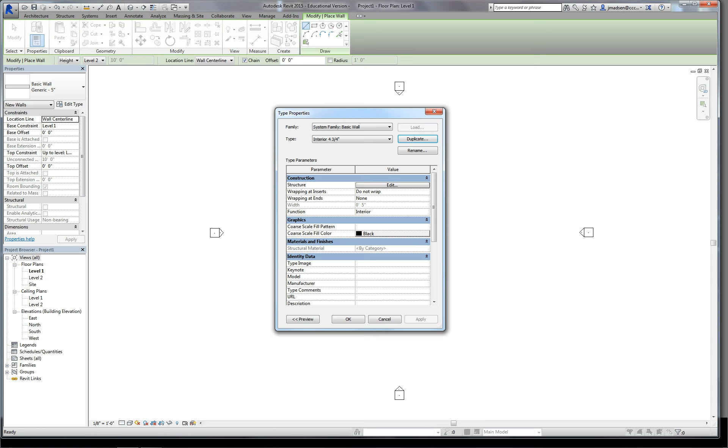So, things to think about - again, we're not going to be doing construction documents. So interior, we can say 4 3/4, right? If we go to our structure, we should know how to do this. So this would be 3.5, right? And then we insert 2 layers.

Take one up, take one down. Now there's not really outside inside, we'll say finish 1. And we can say gypsum, and we'll say 5/8. And whatever, you guys can do whatever you want.

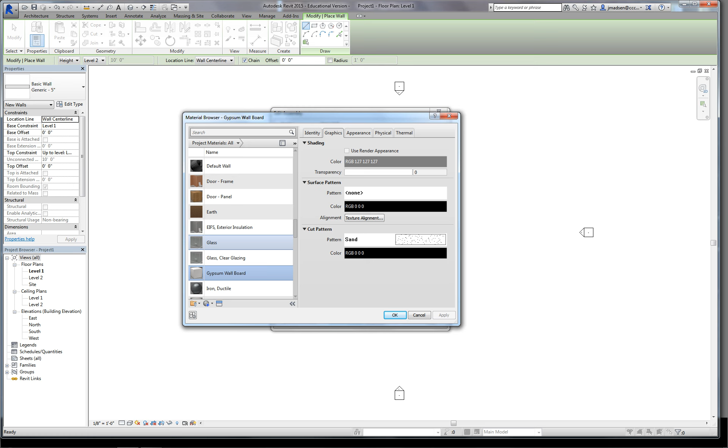You can do wood, sure. I'm trying to remember how they label it - metal stud. Yeah, metal, metal stud layer. There it is. So this has to be 5/8.

So again, we spend this little upfront time, and we can preview it. So there's our total thickness. We verify it, right? 4 3/4. Okay.

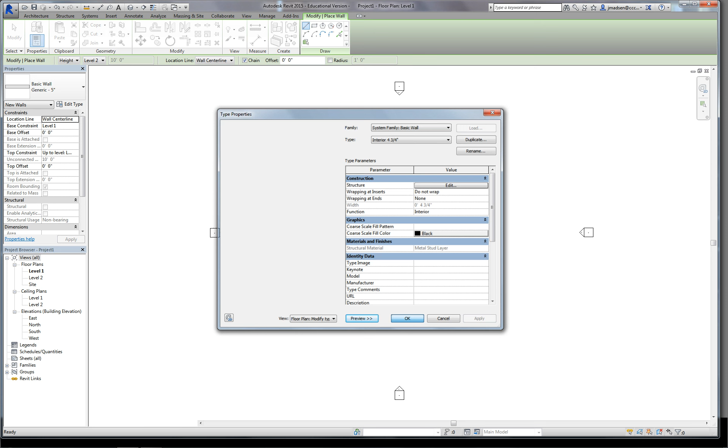So now we have our wall, so we can draw our wall. So there's our little interior room. And again, if we change our detail level to fine, we can start to see a little bit more, especially if we change to thin lines - view, thin lines, detail level, and this is per view, right? So we can change this per view. If we zoom in here, we can start to see some detail.

And if we change our scale, especially depending on what we'll - we start to see more detail in the sense of hatching, right? So all this sort of scaling is set up when we start laying them on sheets, just so you guys have a heads up, right?

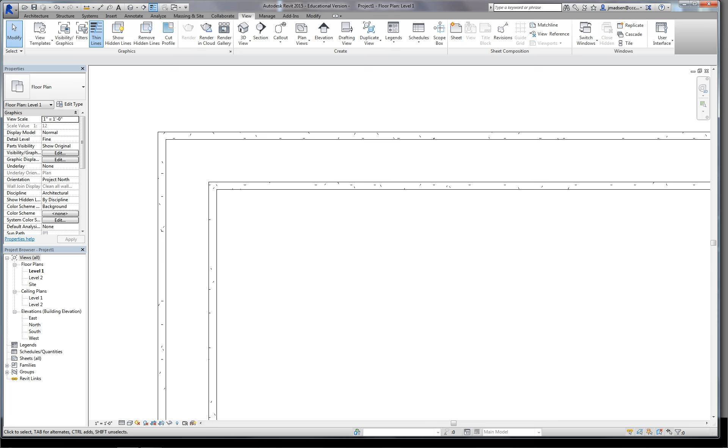Does Revit have the ability to show actual studs? No, you would have to frame it up. Like, is that allowed? Yeah, well we can make - we don't have to manually draw it, we can make...

Yeah, we can make like, you draw a line and it puts them in. I can set that up so it lays them in. You don't need it though - why would you want to do that? Unless you're doing a detail, like a framing diagram - I never got that far in Revit with Ivan. Yeah, if you ever really wanted to do a serious framing model, you can 100%, but then you get into more of the structural range where you're better off working with other tools, because then you can really study it structurally. To do it just for representation is a waste of time. Exactly.

The only other thing is for quantity - if you're going to be that crazy and want to know exactly how, like to the length. No, which is, I'm that type of person. Sure.

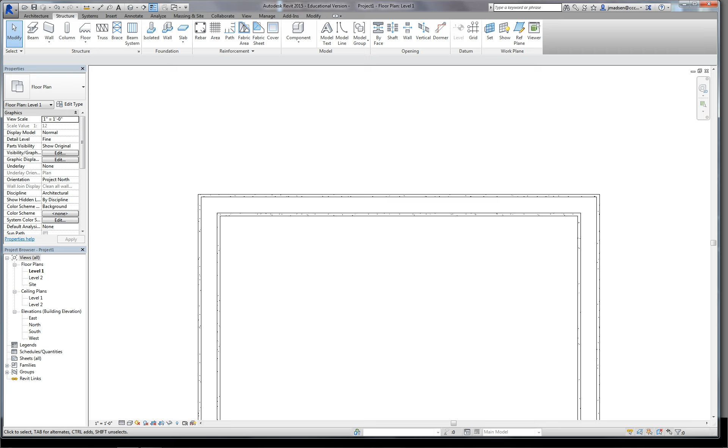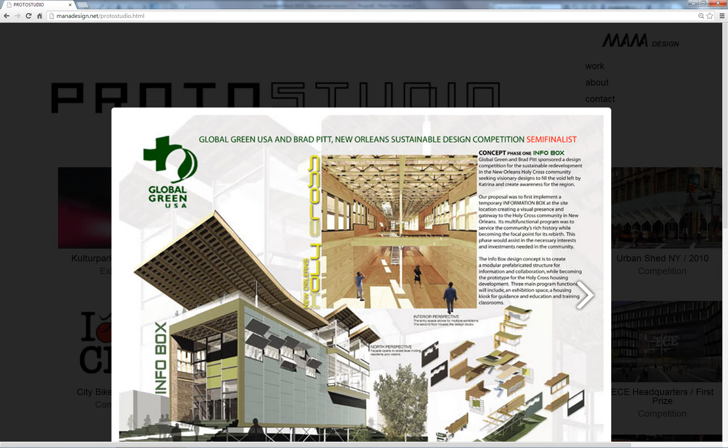So, right, you did something with metal studs. We did, I've done this, for a competition we did, back in the day. It's a little hard to see here, but we drew everything, like everything, and then we were able to count everything - every piece was modeled.

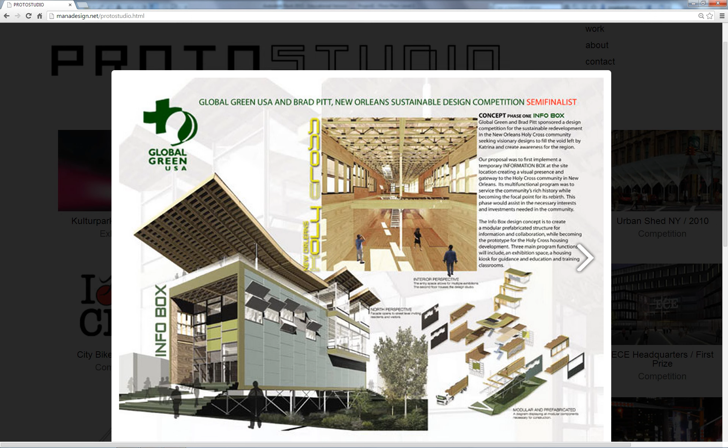It's a little hard to see there, but you see it a little bit better in here. So like everything, every little connection. We did this on purpose to see if we could figure out how many panels you have, because the whole idea is you built this and then it got recycled into this. So we wanted a full quantity count.

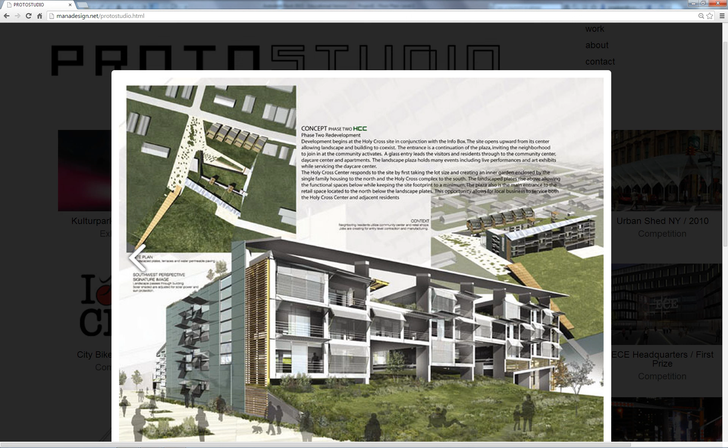So we did this all in Revit. You can do this stuff and get quantities, but be careful. You can do it if you want to crash your computer.

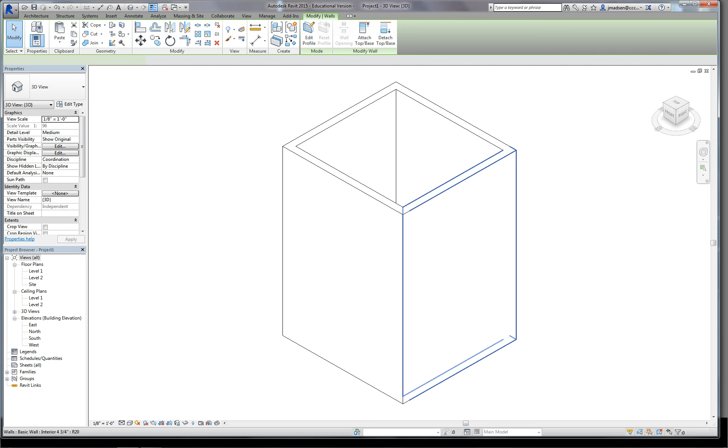So if we go into a 3D view, here's our little box. We are doing the wall openings, where we make an opening. Oh, did I just crash this? And we have an opening.

A lot of times we're going to start doing doors, so we use doors, and those doors will automatically make an opening for us. If we pick this flush door and plop it in here, basically this family allows us to place a door, which is sitting on the ground, but also have all the components like the jamb, the frame, and then also the door itself. And then we can show it at different sizes and so forth.

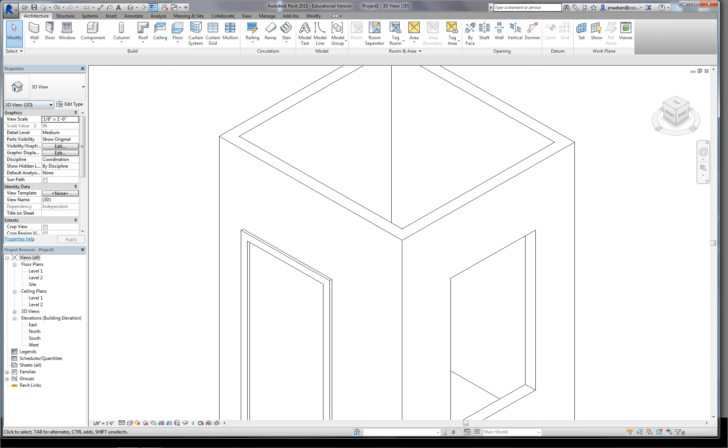So this is a family, all right? To demystify all of these parts, I think what happens is a lot of times people get hung up on like, hey, this is what I've got to use, this is the family. We can customize these. So we can look at door families and customize them and make our own.

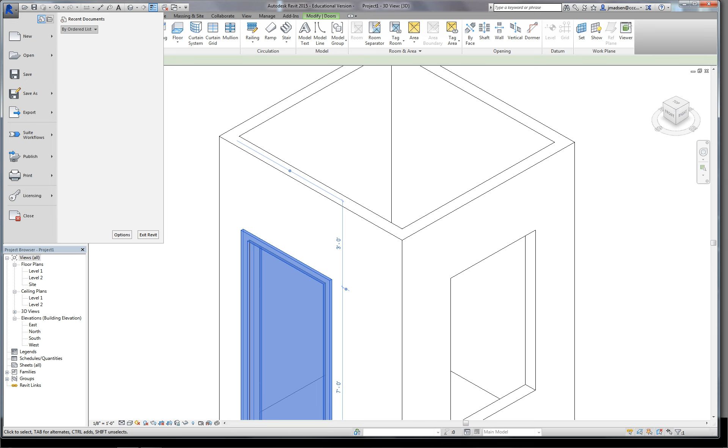So what happens if we go to the application icon and we look at families and we go to family new, there's a whole set of templates, okay? So we can go to a door template. And if we go to the door template, we can see how this door template works, so we can start to get a feel for what's being done.

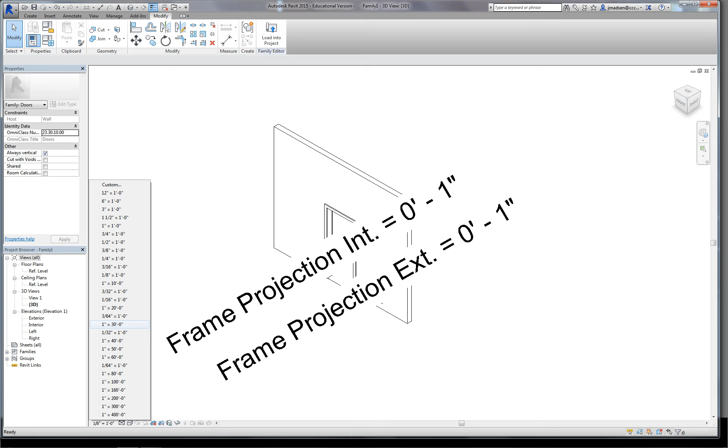So this is basically a template with a lot of parameters. What we're seeing here are parameters. Let me make that text smaller. And these parameters do a couple things, they punch the hole, it's a void.

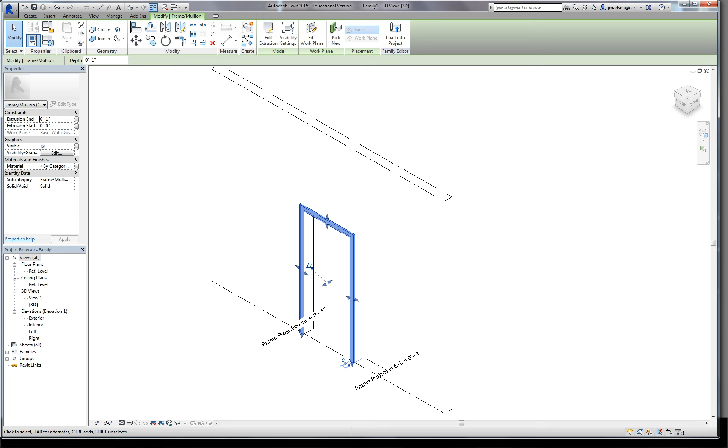So all these tools, I want you guys to feel comfortable, this door tool does a bunch of things for you. It basically punches, makes a void in the wall based on a size, which is the opening, and then makes a sweep. It does all the modeling stuff for you. And this all has different parameters. So if we pick on this stuff, you can see this is just a 3D modeled shape, and it has very specific parameters, like what the depth is. And eventually we can make our own things.

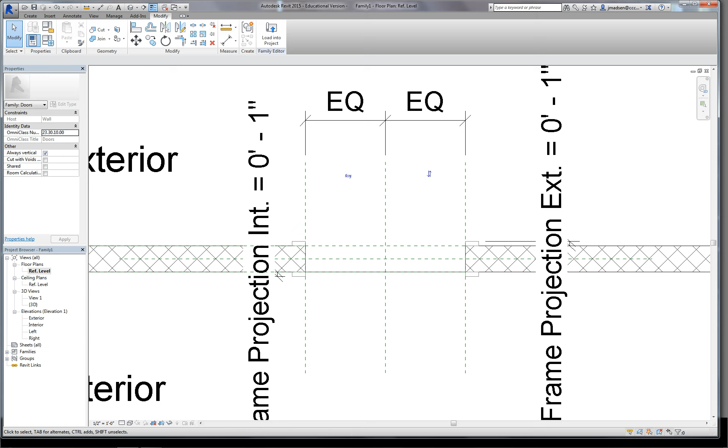Now doors are a very specific type of parameter, but these are actual parameters like the projection for the frame. And if you saw, we look from the top view, there's equal for the opening, like how it mirrors it. So there's all this sort of setup that's done, so when we plop this door in, it automatically aligns properly and so forth. So we can customize these things.

Now obviously we probably don't want to spend too much time customizing too much, but if I click here on the family types, this gives us all the parameters that are preset. So if I come here, these are all the parameters, like width, height, if it's interior or exterior. So this has all been set up for us.

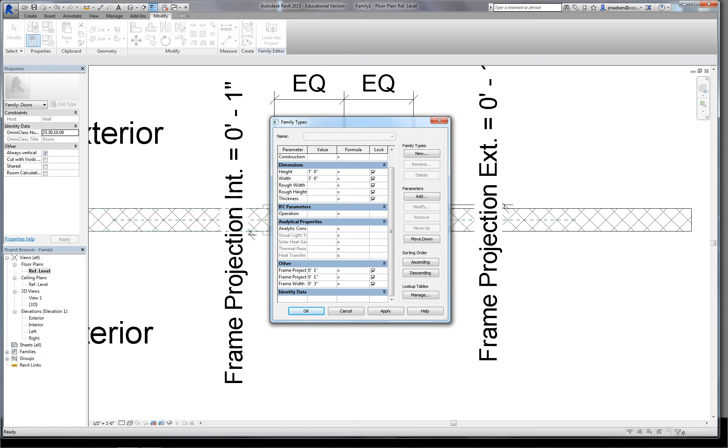The frame projection, the frame width, that's the door frame. We can turn them on and off, so we can customize that specific door to have different type of trim. And there's also the rough. Let's open this up. The rough width, the rough height that we can place in.

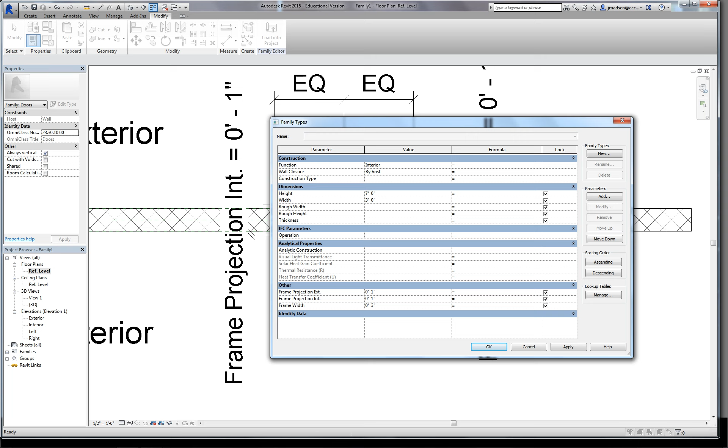So these, this width and height, are parameters, so if we change it, it's going to update. All right, so we see these parameters in that. So once we load this into the project, so you guys know how this is working, and we come here and say edit type, we see those exact same parameters under the type, the family type.

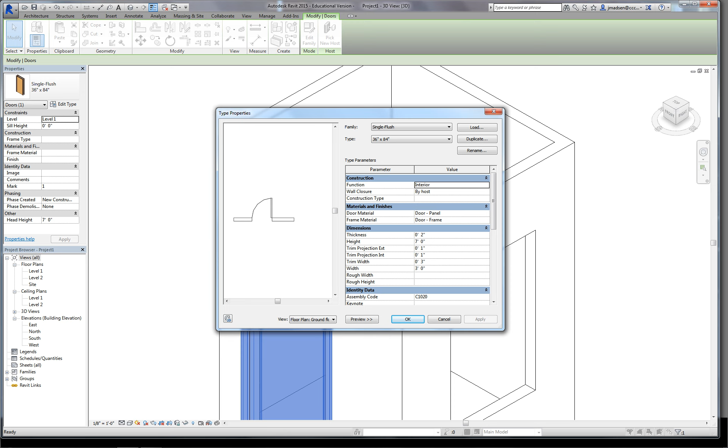So again, it's a very simple concept, and typically the doors that these are representing something. It's not the end of the world, but when it comes to making our own custom families, this is going to be important, to at least get the idea. So it's just how it works, and the walls work the same way as well. I mean, it's a family. And again, we see all these families down here, so we can see what's loaded.

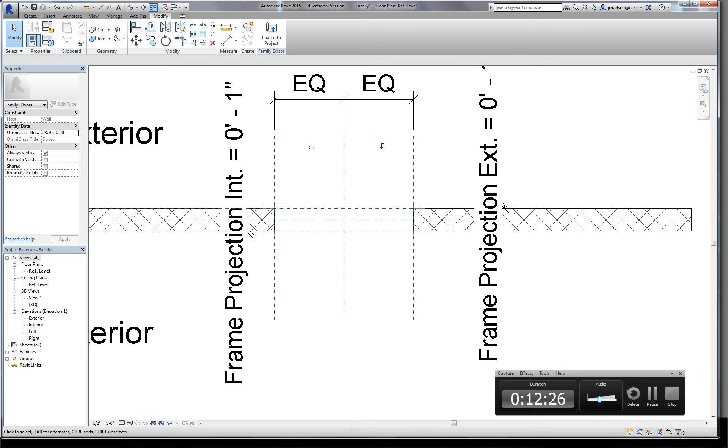Right now, single flush is loaded. And if I right-click and go to type properties, it brings up exactly these are all the type properties for these doors, all these parameters being set in the family. You could pull that molding off and all that kind of stuff. Yeah, you can come here and turn things off. You can turn it off here and reload it. So I can take all my frame.

You want to do something more modern with reveal and no molding, that kind of thing. So we can take all of that, should turn it off. Maybe it's not going to turn it off in here, but I can turn it off in the... so if I come back here, oops. Typically I can turn that off in here as well. Well, it's giving me the set.

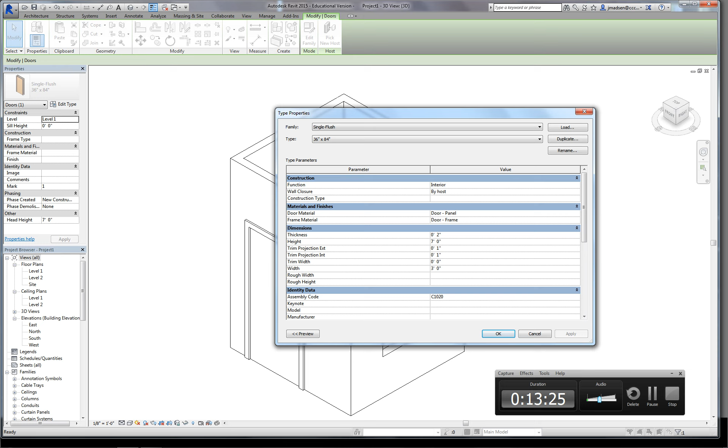Modify it. Yeah, we can modify it. So it won't let me go to 0. It's funny, it didn't let me go to 0. But what we can do, we can delete it and then load it back in.

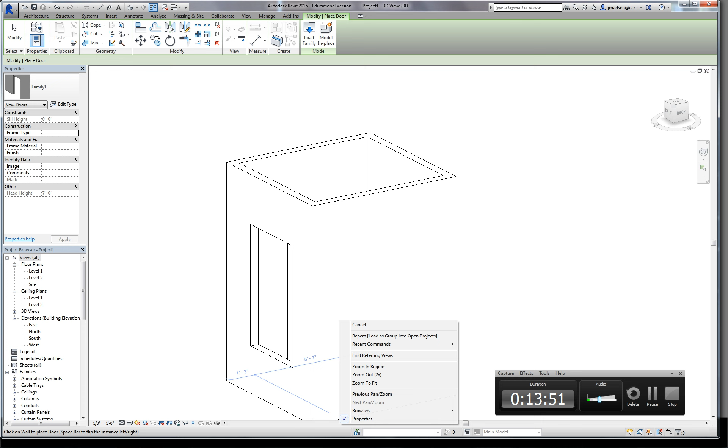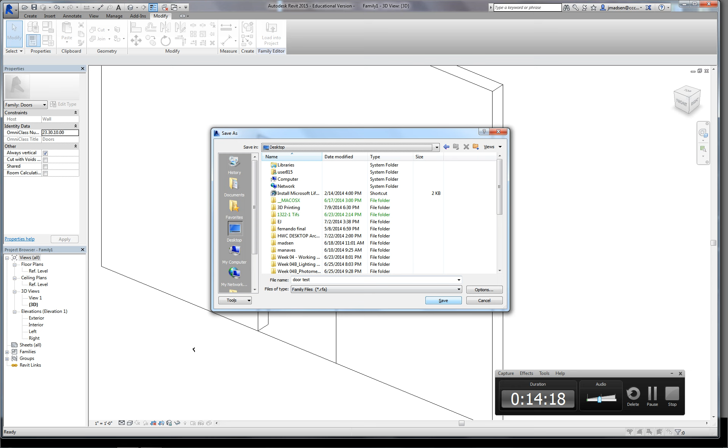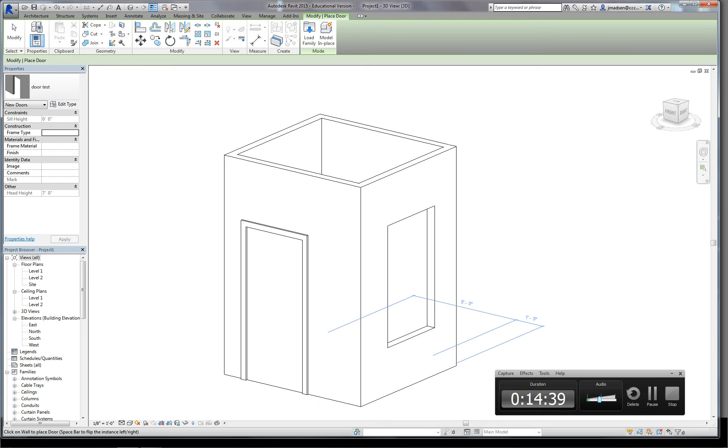And I should have overwritten it. Hold on, let me do a save as. So there it is. Now the door went away with it. Looks like I deleted the door. So you can customize. All right.

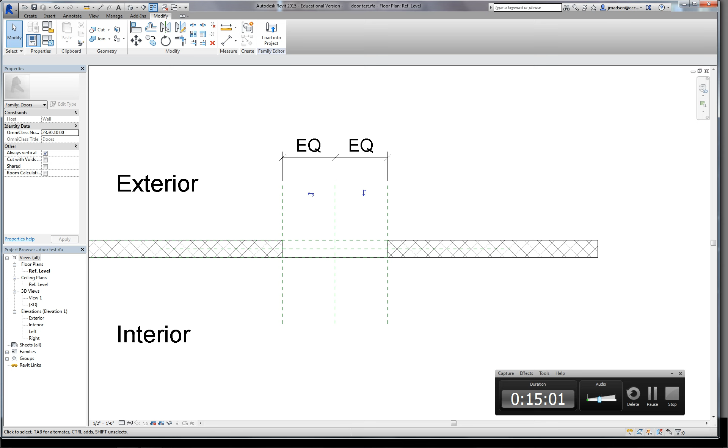So this just has a hole. Yeah, and if you want to make these custom elements, so let's go to this door, let's go in here. If we go into 3D view, what can I start doing? I can start creating a sweep, right? So if I make a sweep, I can pick the path. So this is where we can start custom modeling all this.

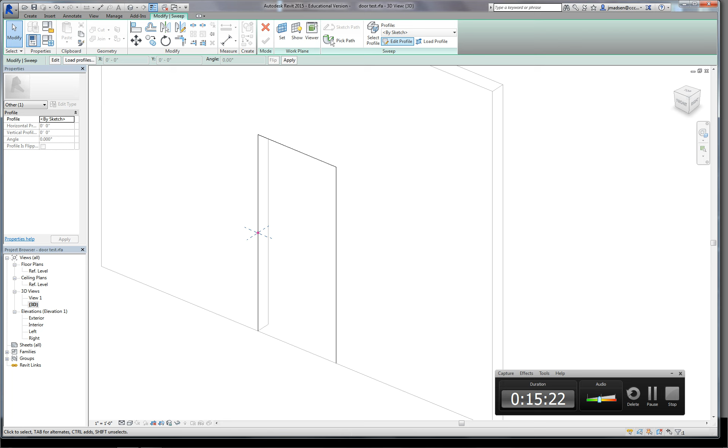All right, and then I'm going to go ahead and sketch this shape, so I can make a custom shape. Let's go ahead and just make something that's going to be obviously visible. So I'll sweep this. All right.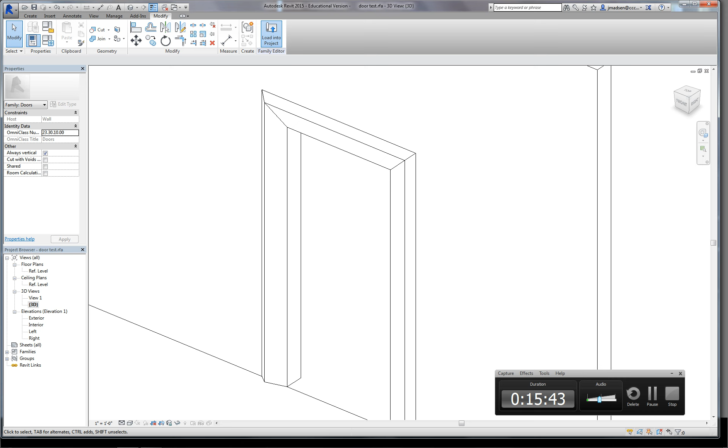Now if I load this back in, our door has the trim, and that's on the, and I have it on the inside. So it's no problem. Say I want it on the outside, just flip it. So we can customize all of this, all right?

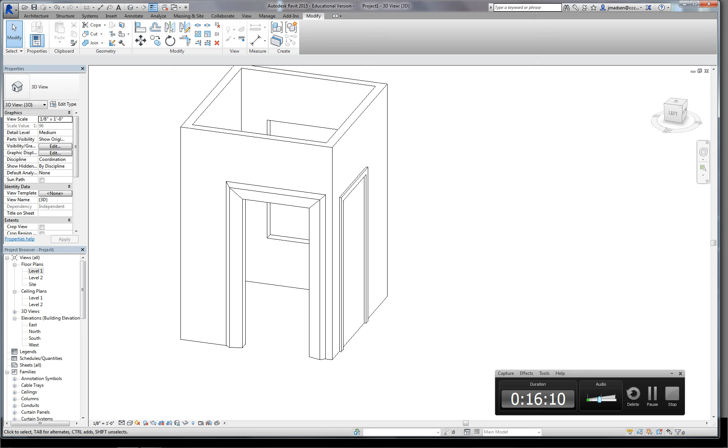Can you do the same thing with boards? So if you reveal into the wall, so if you had a piece of trim and then a reveal and step back into the wall? One more time, sorry. Can you do a piece of trim with a reveal next to it and the reveal that goes into the wall? Yeah, that's what I was thinking. Yeah, but we do it differently. That's what I was saying.

We do reveals on, so if we're doing like, if we pick a wall, like watch this. Say we have specific things, 2 walls. If I go to edit type and I go to edit, what I can do down here is insert, hold on, let me go to section. So you got to switch to section. So here's a section. So what I can do here is add sweeps or reveals.

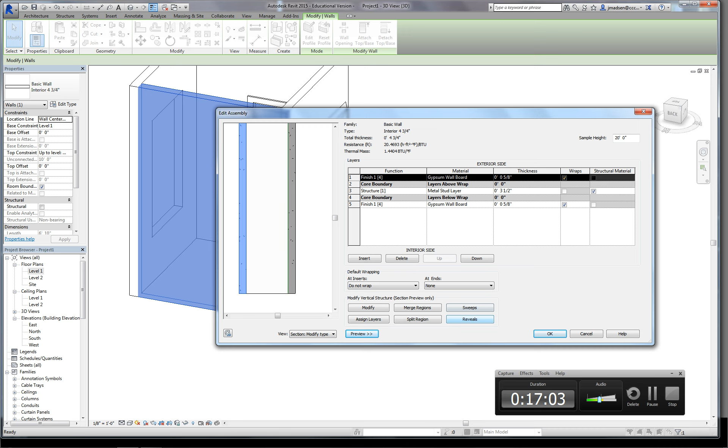So I can add a detail, so I got to load a profile. So this is how we do all the trim stuff. So I need to load a profile, so we need to make a profile. So let me make a profile first. All right, so say we want to add base trim, and then we want to do some type of reveal above the base trim, all right.

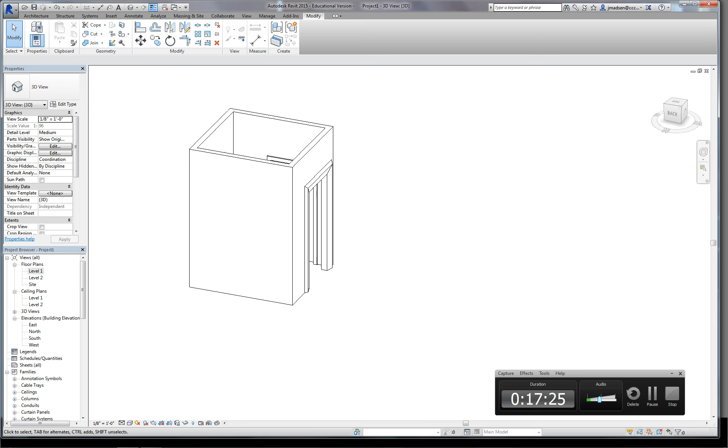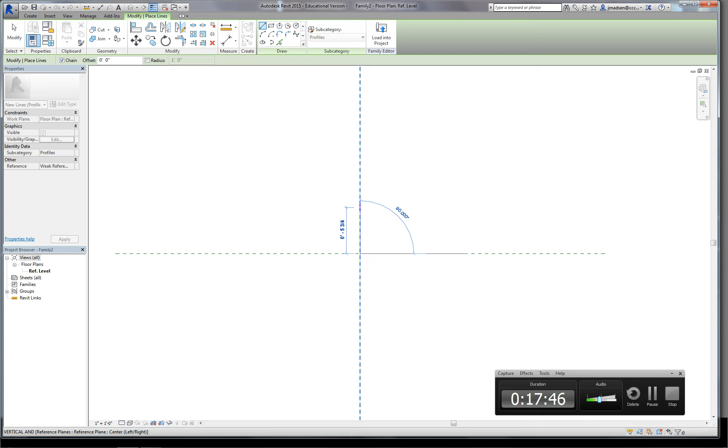You know, which we'll just... so we're going to go ahead and make a new family, and we're going to make a profile family. Okay, so we're just going to make a profile, and we typically have to remember like outside and inside, so sometimes we goof this up. But I'm just going to draw a profile, say we're doing something 6 inches tall, and then I'm just going to do something real quick.

So say this is our profile. I'm going to save this, storing everything on desktop, so it's going to be our trim profile, say 01. I can load that into the project.

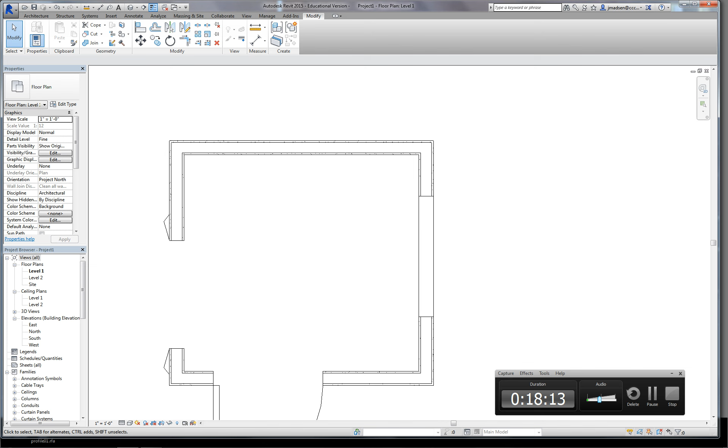So if I come here and pick that wall and edit the type, I have to switch to section, edit, and then typically we want to zoom down here, and then we'll go with sweeps. Let's see, so we can add a profile, and let's see, our profile should come - trim profile, hold on, there it is. You guys have better eyes than I do.

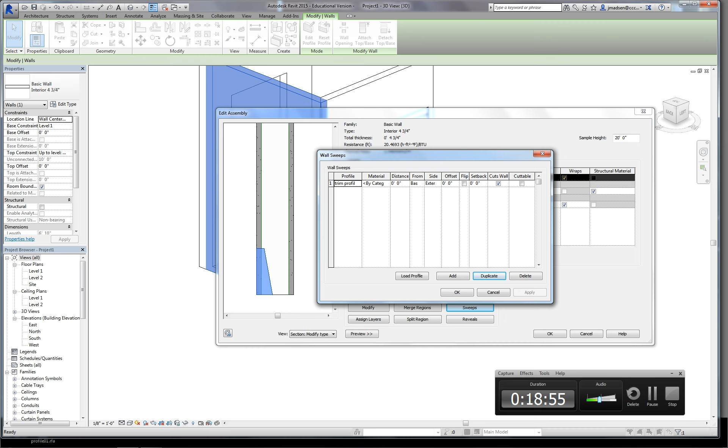So we add a profile, we load it, and then we can apply it, and then we can see we have it on the wrong side. So this is how you learn. So we got to go back to our profile. Just hit OK for now, and just hit OK, and just hit OK. It's inside our wall right now, we can't see it. But if I come here, all I got to do is mirror this.

Sorry, I'm like in a different program. Yeah, it's my day, it's called bipolar cell phone. Yeah, hold on, I gotta.

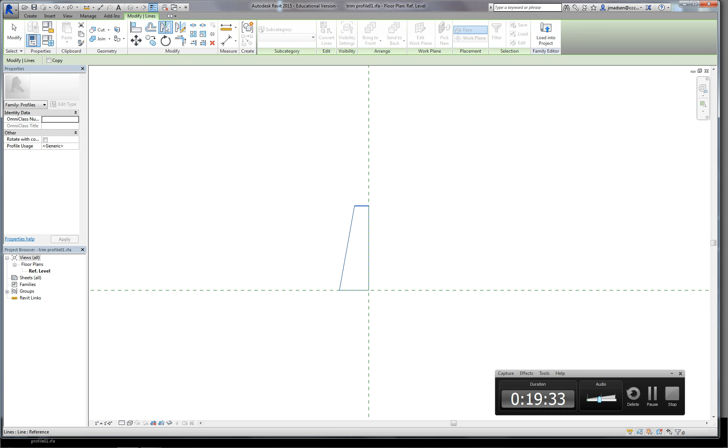Okay, so I'm going to keep at it. I'm going to load this and overwrite, so then I'll flip on the right side.

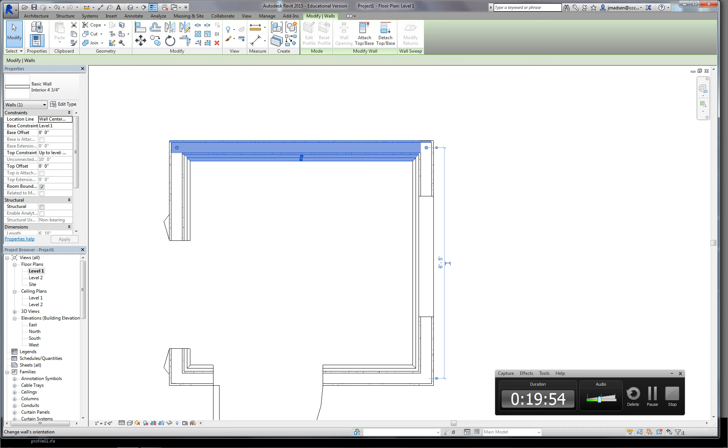So that's going on the inside right now. No problem, these walls have inside and outside, so I can flip it. Let me undo that. If we use the tab key, we can pick all the walls, but sorry, we've got to flip them individually.

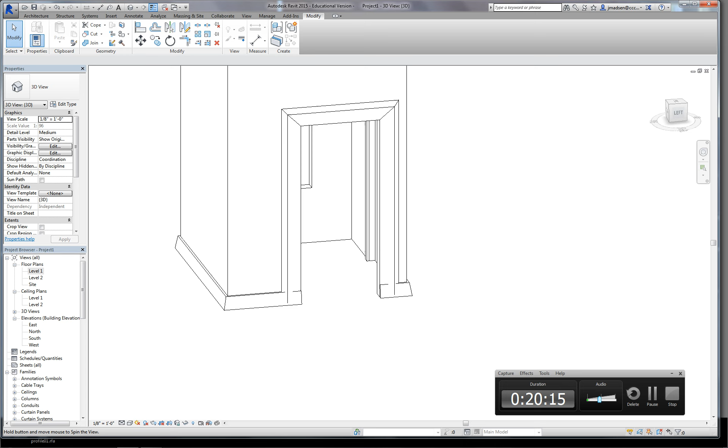So now if we go to 3D view, there's our trim. And we have issues with the door, with how it's dealing with openings. But we can customize all of that.

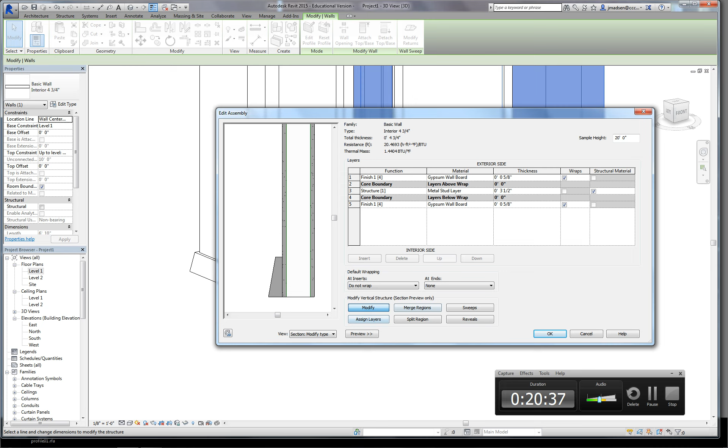So if we modify, we can modify that. Let's go back to sweeps though, hold on, because we've got to do it in the sweep.

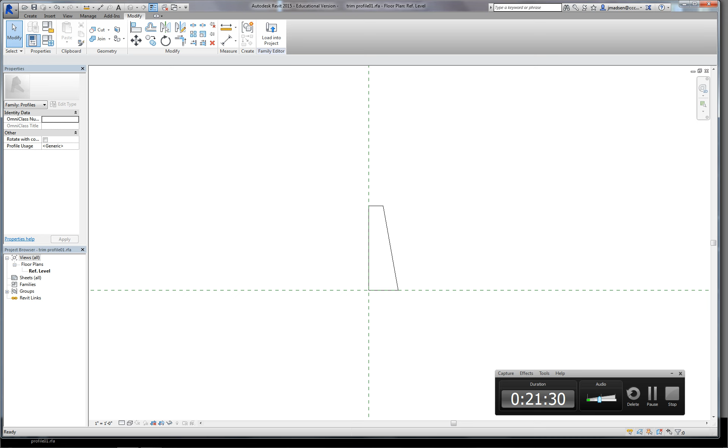So we can start setting up parameters. So I make this a dimension, and then I add a parameter, and I say trim height.

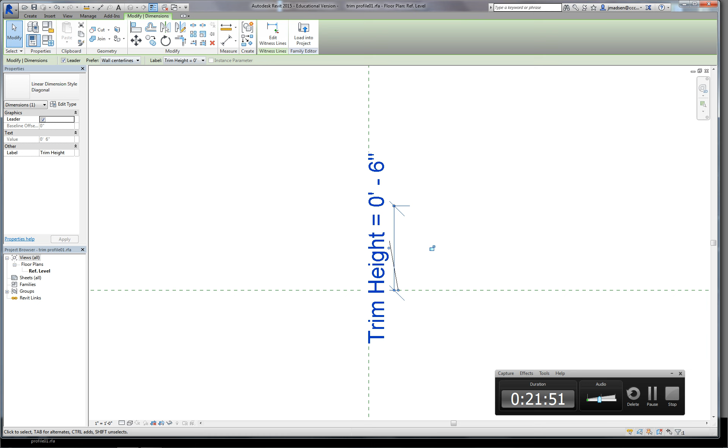And we're going to do more of this, I'm doing this pretty fast. And then I reload this into the project, and I overwrite with its parameter values, so it updates it with the parameter values. Now when I'm in here, I can come to the family.

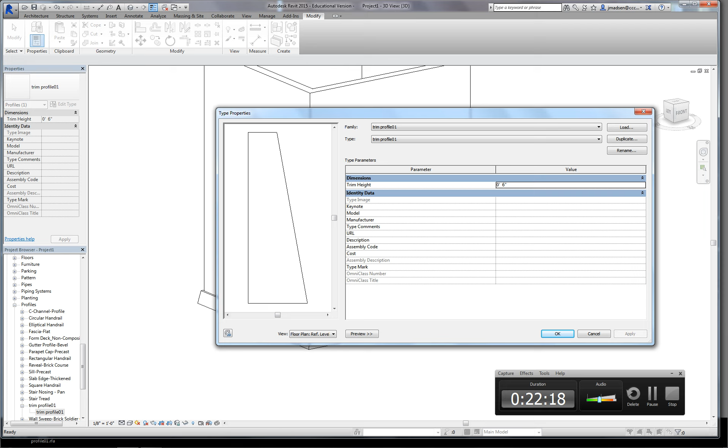And we're going to look for profiles. Find my trim profile, come here, right click, and go to type properties. And we'll have this parameter, which is trim height. And if I change this now to, say, 1 foot, apply, hit OK, it'll up it 1 foot.

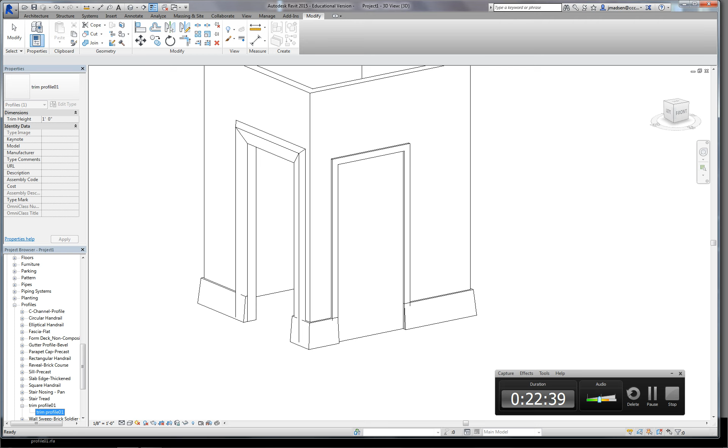So this is where we start making our own parameters, similar to the way the door is, right? So we can make this profile with these parameters and then adjust them, so you don't have to have like 20 profiles. So that's sort of one trick.

So when you guys can start building your walls, I mean take it easy with the trim stuff. But let's look at making reveals, and reveals are a little tricky because sometimes...

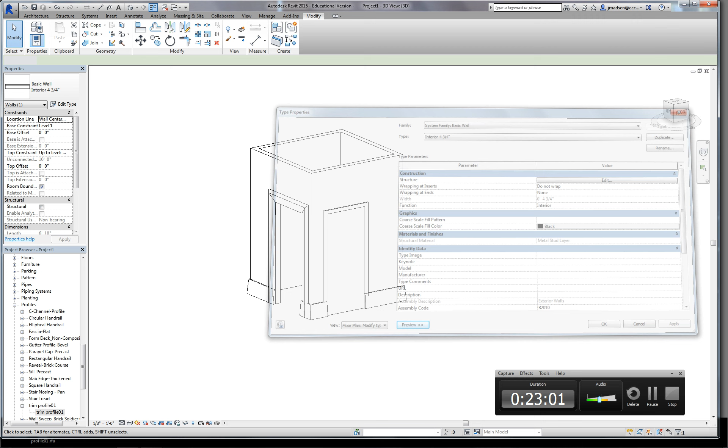Oh, not our exterior wall. What did I do? Oh, it's just our trim, sorry. So let's go to section.

So we can edit, so we did sweep, so we can do reveals. So add a reveal. So let's just use a C channel right now.

So let's move this up. Guess flipping it maybe won't do it.

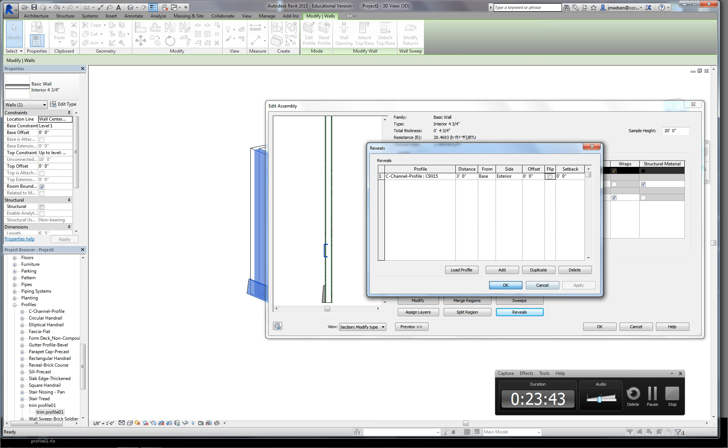So this will make a cut. So this is making—I use the C channel to basically be a void, just so you guys can see it—but this makes like a reveal in the wall. So you can make your own profile, reveal profile, and then sweep it.

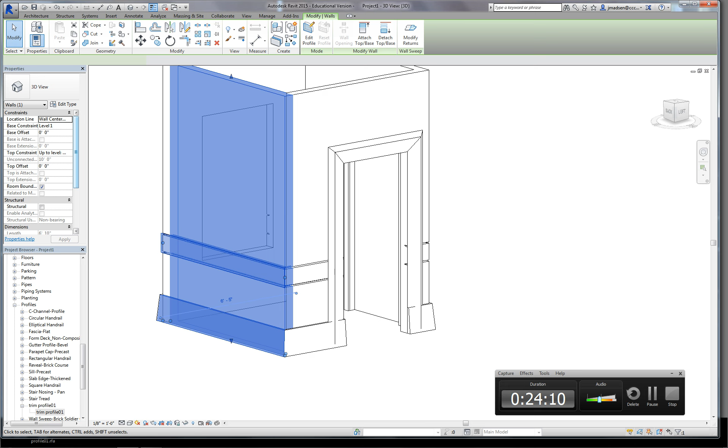And then you can also do in the wall, besides reveal, we can split it. Like split the wall, so exactly, so the wall changes. So maybe it's like concrete to this height, and all of a sudden it becomes something else. I haven't done this very much.

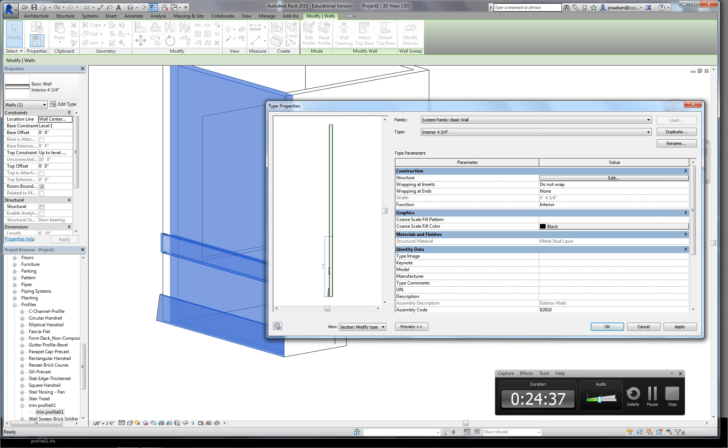But you know, go ahead. I haven't really dealt with that too much. I mean, this is probably doing some interior sweeps, so if you're doing interior elevations, you get trim and so forth. But you guys can start doing—I would start adding doors. If you want to start adding the sweeps, the trims, that's fine.

And again, we can do this. If we come here and we're doing sweeps, we can add sweeps, add the same trim profile.

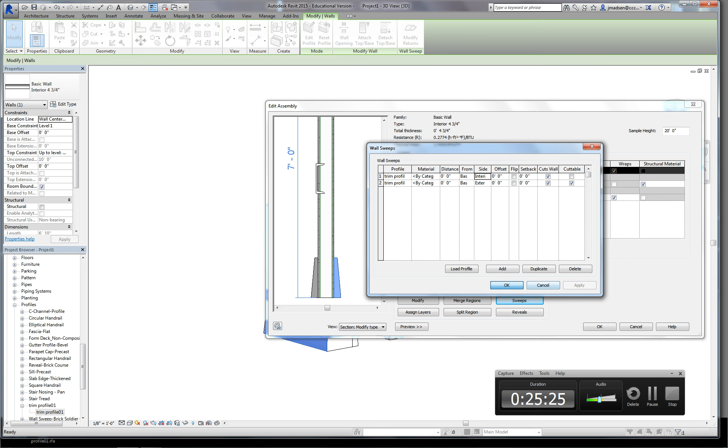And then do interior side, so we have it on both sides. So now it's both on the inside and outside. Okay, so we can start getting some detail in there. So again, don't overwork yourself with that.

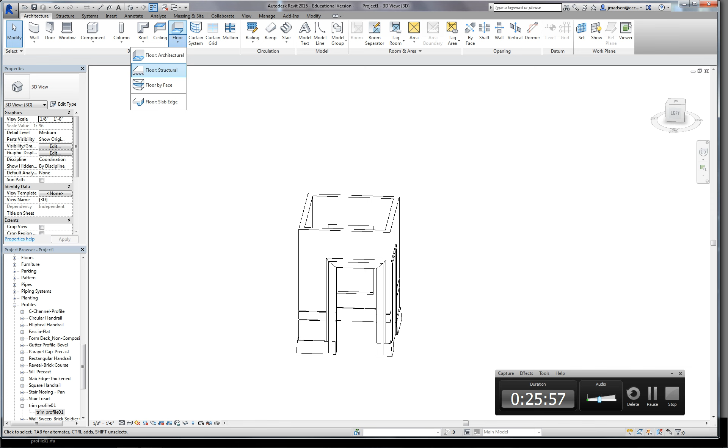But now we can start creating the walls, all right? And then the same thing we can do with the floors. So our floors—just make a floor real quick.

So we can start thinking about the floors. We can duplicate, if I can spell it right, sorry.

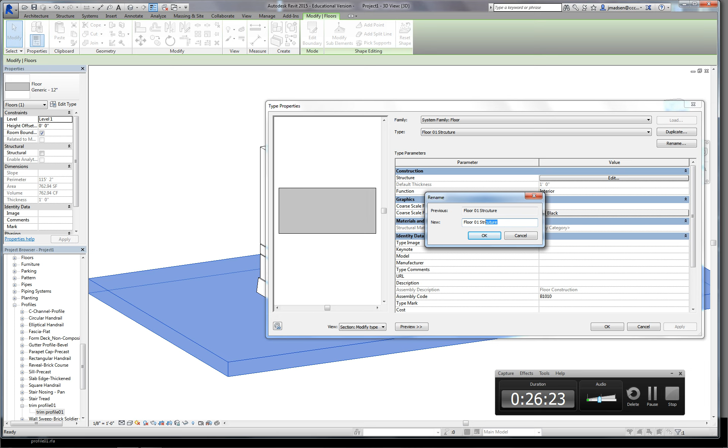So the same thing, so if we have finished material, and you want to have some type of finished material, yeah, I guess we might have some limited choices. So if you don't see a specific material here...

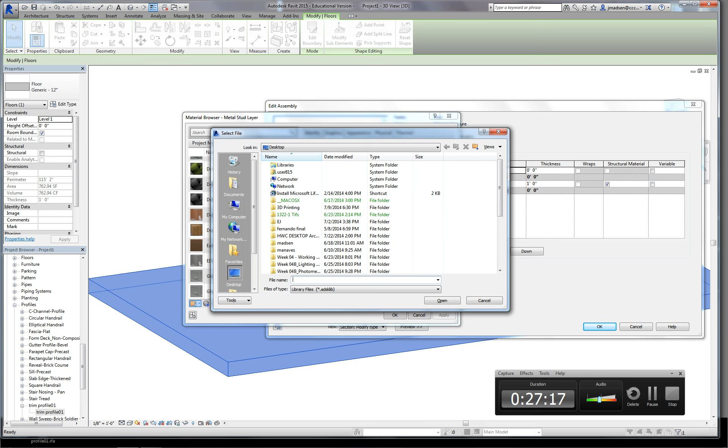Let's open an existing library. So we can go to open existing library, and yeah, it's not pathed, so I'm not sure if on these computers this is going to work. On your home computers, you might get more luck. Let's see if we can find it. So the other thing is there's the material browser. Let's see if we get any.

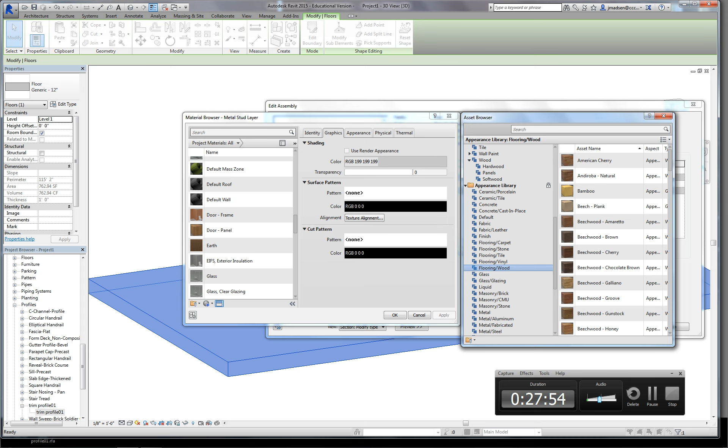Well, it just has hardwood. Let's go further down, so there's some flooring. So if you want a specific type of flooring, we can get it in there.

Whoa, wait a minute, we're on our floor, right? Oh, actually yes, so you changed the metal stud layer to be that type of wood floor. Oh, is that what I did? Yeah, sorry. So we need to make a new material.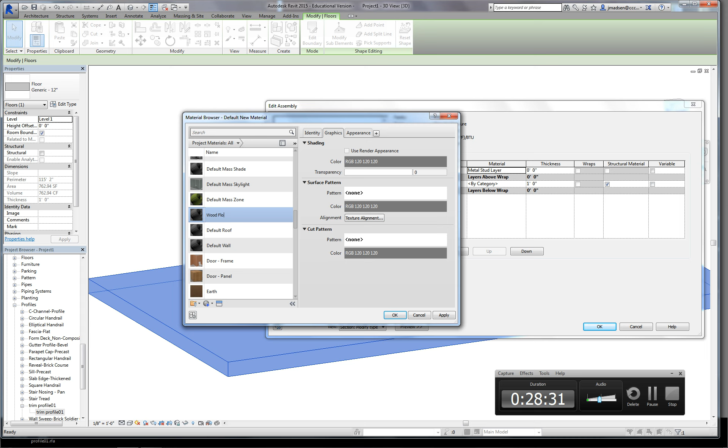So we'll create a new material, then we can rename it. So this will be wood flooring. And then we'll apply it, missed one step.

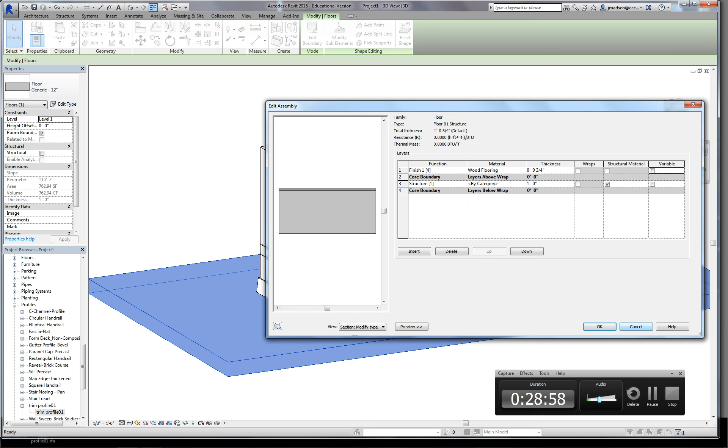Here we are, so go three quarter. So yeah, we won't see this until we get to like where our top isn't.

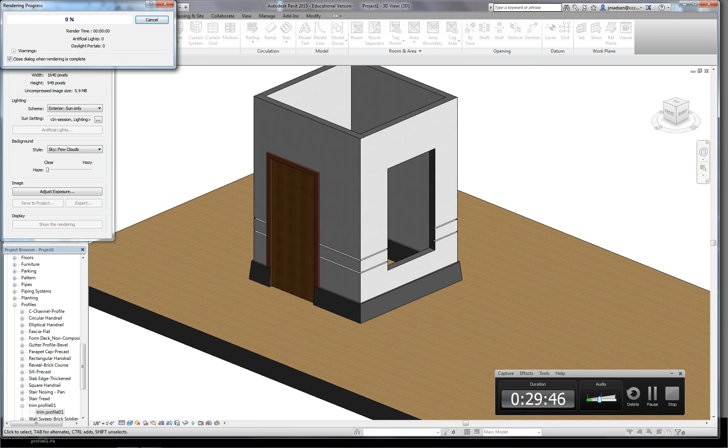Is there a way to make it look more realistic and all this? Not in the preview. I mean, if we render it, it'll start to look like something, you know, like a bad project. So, you know.

So the last thing I want to show is the cameras. I think you guys have to start putting in some cameras, and be careful. I think don't over-compartmentalize your interiors, right, unless you have a lot of space.

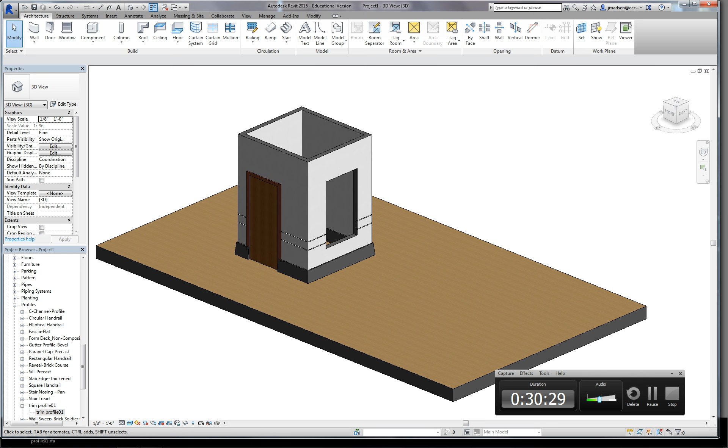So you guys have lived in a house, I assume, so we'll use your life experience. Sorry, let me go back to Level 1. So if we're looking here and we want to set up a camera, we can go ahead and go to View, 3D View, Camera.

And then we can click and then look. Okay, and this will set up the beginnings of a camera. This is sort of the extent of what our camera is seeing, so this is like our crop.

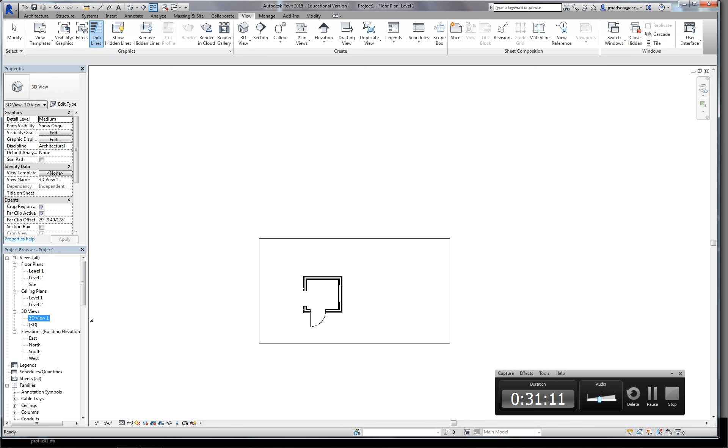There's also, if you go back to Level 1, we'll lose this. So if we go back, our camera is here now. We have to right click and say show camera, and now the camera reappears.

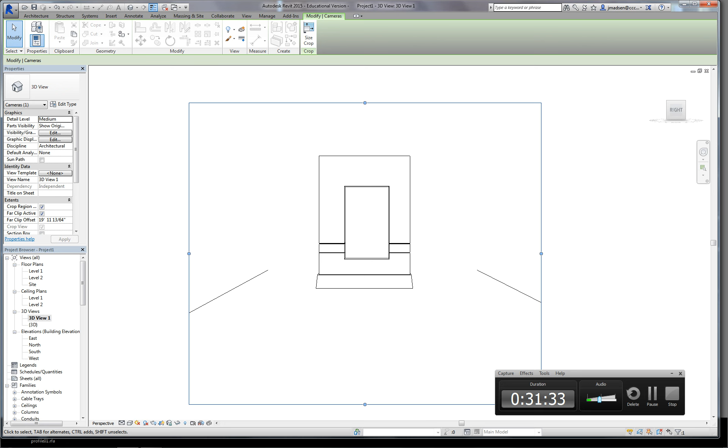So you have to take care, this is the crop, this is like where it crops it. So if we're in the 3D view, it'll cut it too short. That's why we're missing the floor there.

So if you go back to level, you always want to make sure, this is like our target, we want to make sure our crop is good. That's where we're pointing. Again, if you lose the camera, right click, show camera.

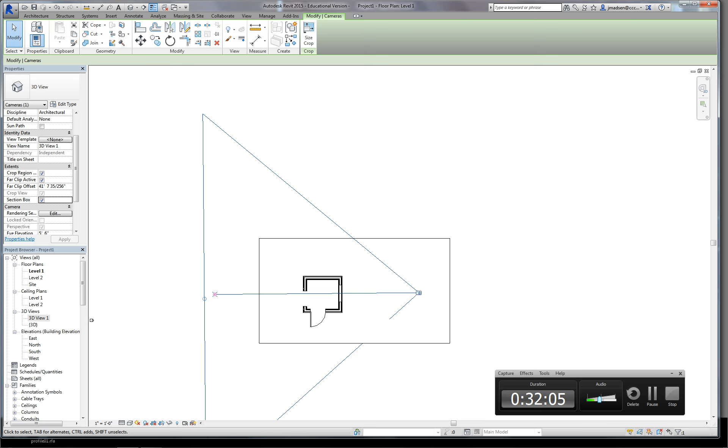The other thing we can do, you can see the far clipping box. We can also make a section box and do like a section cut. We won't do that right now, but eventually we can make perspective section cuts, which are sometimes interesting. But this will allow us to eventually do that.

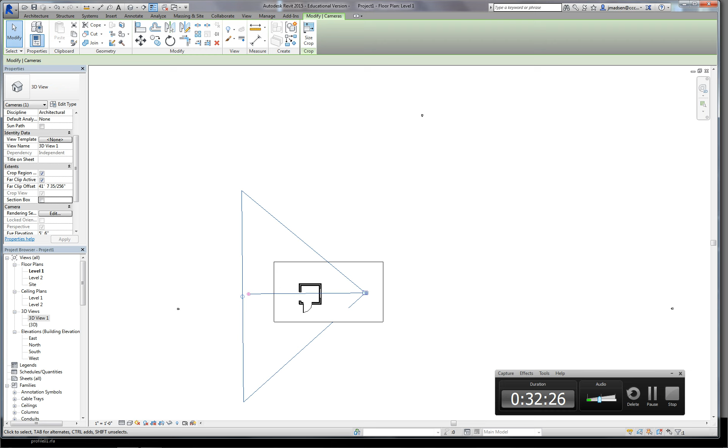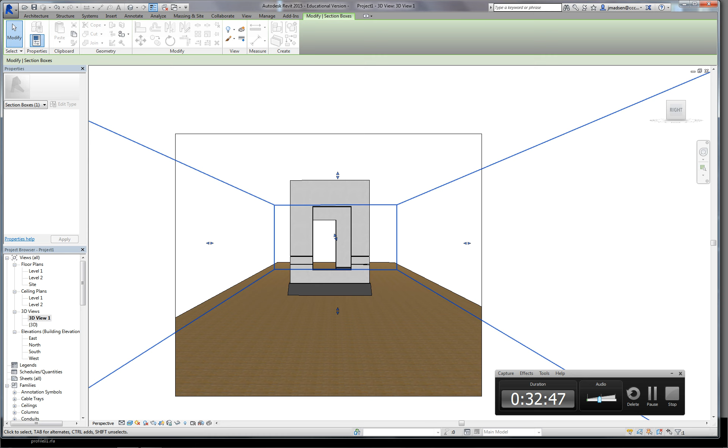Can the camera, yeah, if we make a section cut, we can't really see it right now because it's way off the screen. But if we were to pull... so I pulled the back side, but say we go this way, we can cut the building.

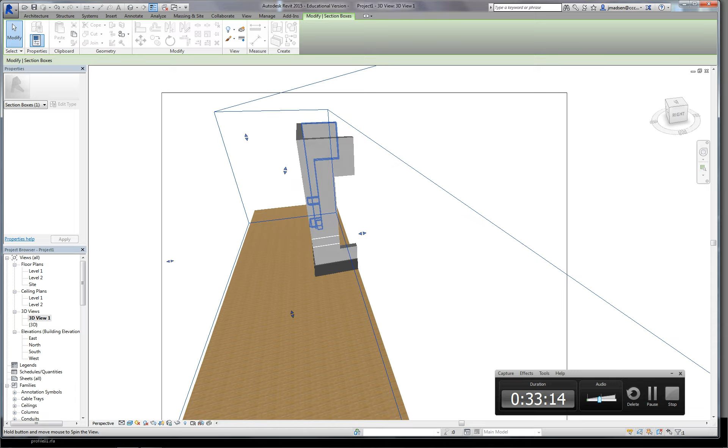And then we can start setting up our camera like that. So this is how we can start making those perspective sections.

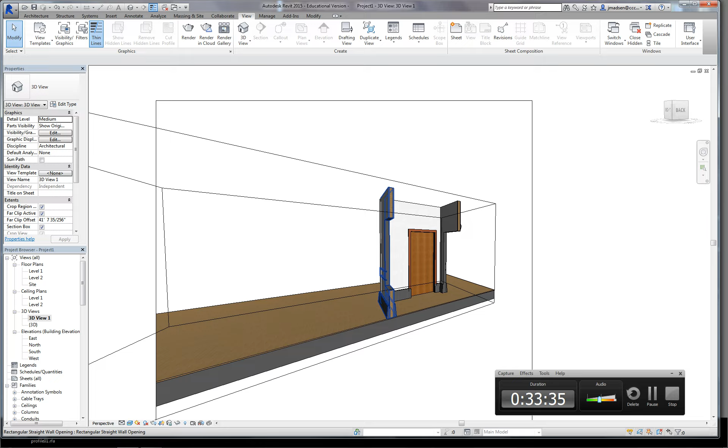So, you know, it's actually nice because you actually see the material. But I think for you guys, you can use the camera to start to understand your space and get a feel for what the interiors are.

Can the walkthroughs go upstairs? Say it one more time. Walkthrough. The walkthrough. Don't use the walkthrough, no. I would control the camera. Okay.

So start making the interior walls. Start thinking about whether there's doors or if they just sort of punched openings, for the interiors. And then ultimately we'll go back to the exterior walls and start adding windows, looking at the windows and making our own custom windows per se.

And then I think the next part is making this 3D model, which I want you guys to print, but print larger. Last time we were going to do it as these plates and walls, but John kept mentioning about flipping the model on its side. So we're only cleaning out half the stuff, but I think that's still not going to work because we'll have trapped areas.

So the next thing I'm thinking is, rather than 3D printing the floors, this would be a good opportunity to use the laser cutter, and we just laser cut the floors out of acrylic. I know some of you guys have acrylic and some don't because some of you are doing acrylic stuff.